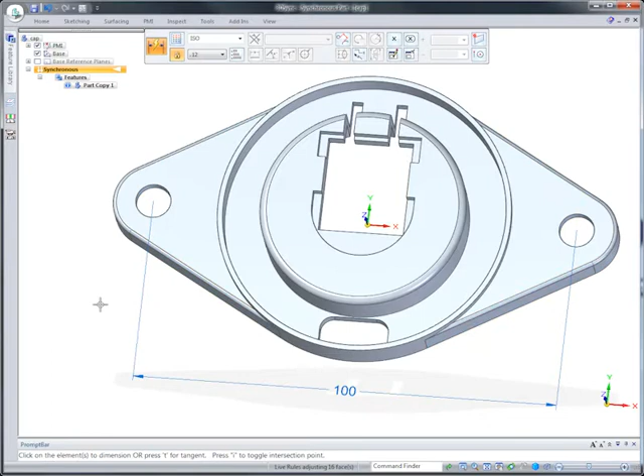This first part requires some changes, but feature definition is lost in translation. A redesign can be costly, but synchronous technology and 3D Sync makes changes fast and easy. Add dimensions to any portion of the model and edit them to get the exact size.

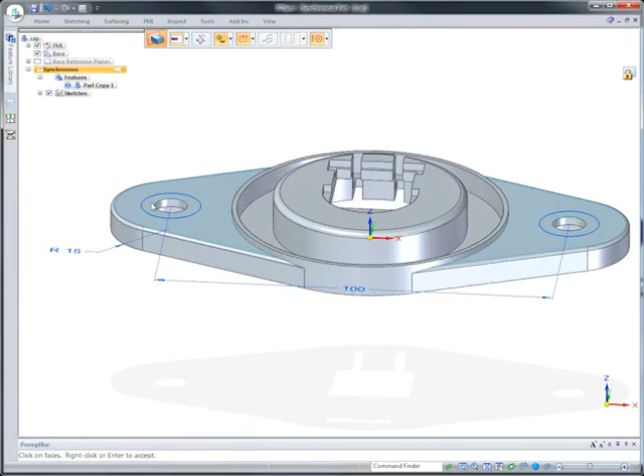Next, we'll quickly generate new 3D geometry from a familiar 2D sketch, resulting in a couple of new mounting bosses, their height driven by existing geometry. As the center face is edited, the mounting bosses update.

Faces can also be rotated, and Live Rules, unique to synchronous technology, finds and changes symmetric counterparts, ensuring the original design intent is kept.

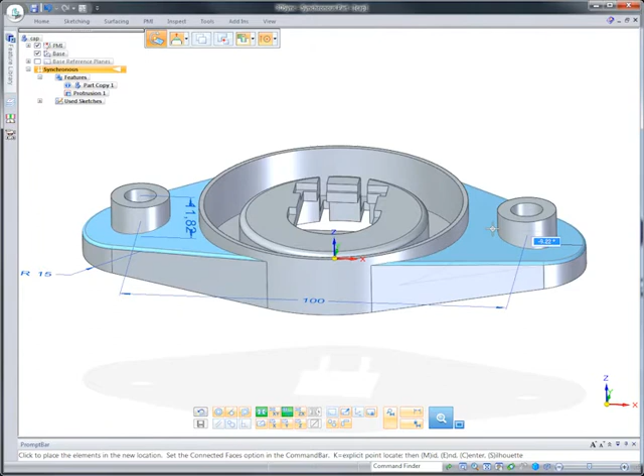Unnecessary geometry can be deleted, and selection based on a feature type speeds the process.

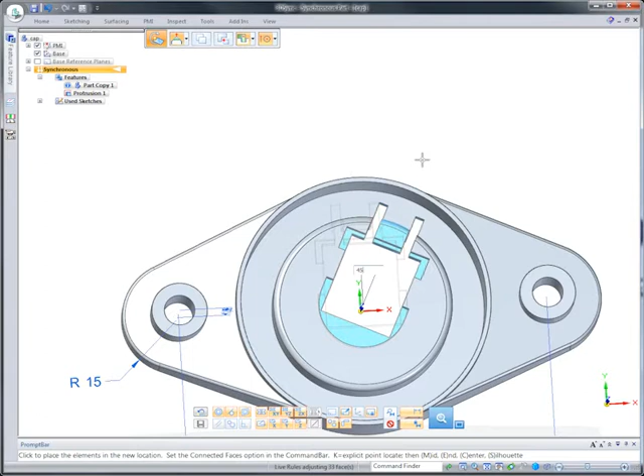2D users are familiar with fence dragging, and 3D Sync works in a similar manner. Watch how easy it is to draw a box around the geometry, position the steering wheel, and morph the part into a different shape.

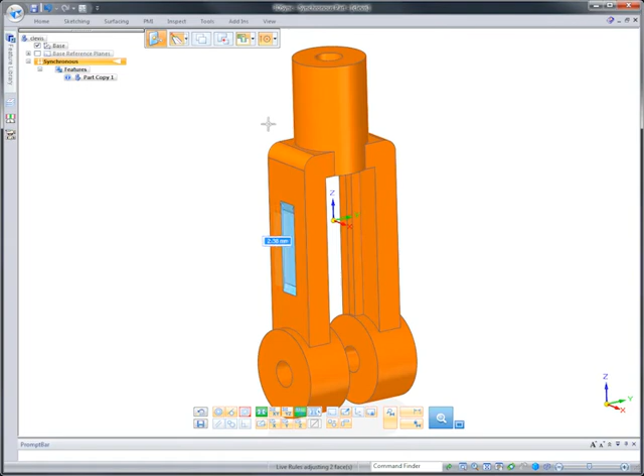Synchronous technology excels at making more complicated edits. This clevis part, originally imported from Pro Engineer, needs to be widened. As we modify the external mounting tabs, notice the options that maintain face size while choosing to add or remove material. Next, we'll widen the part.

After a simple fence select of one of the arms, we'll rotate the geometry by dragging the steering wheel to the appropriate angle. To ensure the intent is preserved, notice how Live Rules finds and maintains symmetry, so the other half of the model updates automatically.

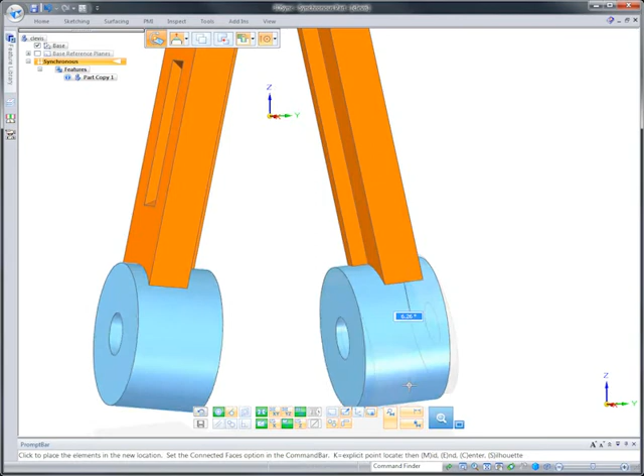One final rotate will align the mounting bosses. The internal stiffening ribs can be aligned with a click of the mouse.

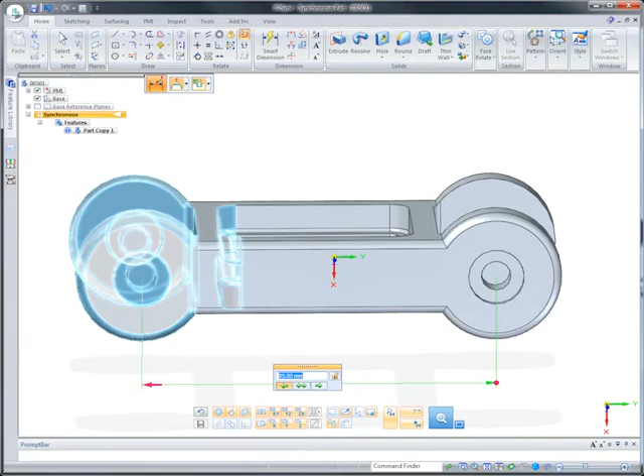Let's make some dimensional edits to this SolidWorks part. Unique to 3D Sync are 3D driving dimensions, which can be applied between key geometric features. When added between the alignment holes, we can edit the spacing directly.

3D driving dimensions can be placed in a stacked configuration and locked to preserve distances. As the interior clearance is modified, notice how the linkage thickness remains.

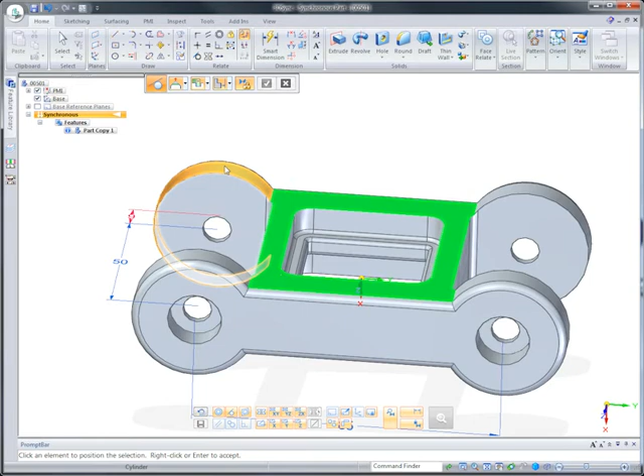To complement dimensional edits, geometric relationships such as this tangency condition can be added. Live Rules automatically finds symmetry within the part and applies tangency to the bottom face chain.

Within 3D driving dimensions, the direction of the edit can be managed: left, right, or symmetric. During each edit, notice how Live Rules automatically keeps holes aligned and concentric.

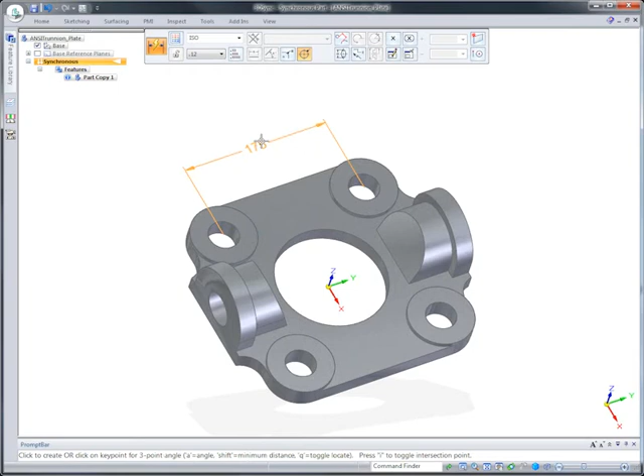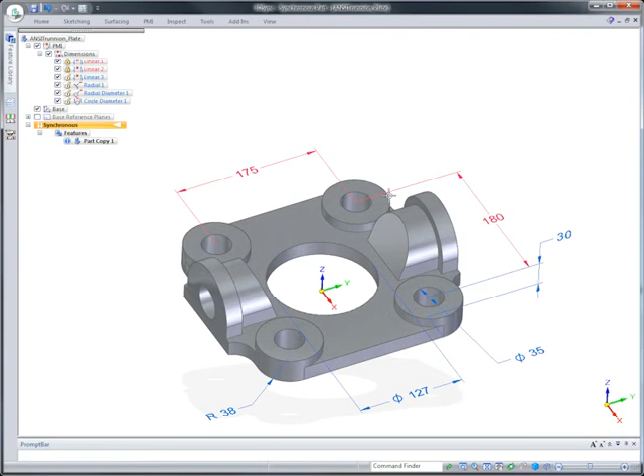3D driving dimensions can be related to each other using equations. Change the first, and all related dimensions update. All dimensions are saved with the model and can be managed in 3D Sync's variable table.

Imagine the possibilities in being able to add, relate, and edit dimensions on imported models.

Live Rules finds and maintains geometric conditions and is extremely flexible. Options provide for inclusion or exclusion of geometry during any edit. Here, we want to modify just two mounting bosses.

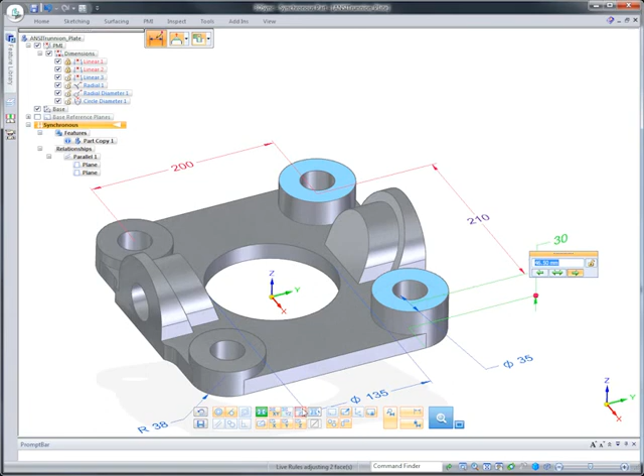Other options in synchronous technology let you control the impact of edits on surrounding geometry. Notice how the clearance hole is preserved.

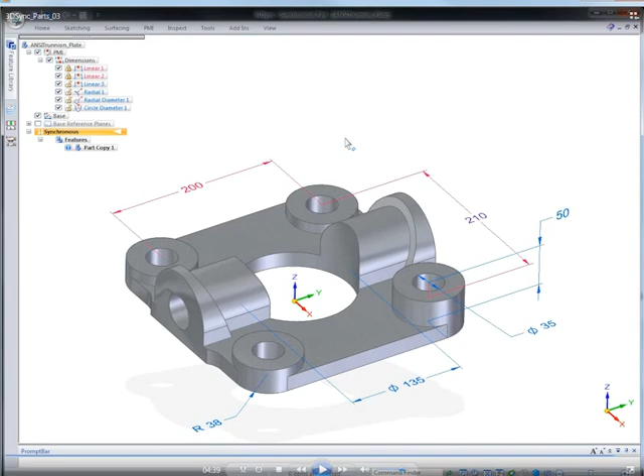If you need to reuse imported mechanical parts or assemblies, 3D Sync is the perfect complement to your CAD system. Edit imported data using synchronous technology and get products to market faster while reducing the costs associated with reusing imported data.